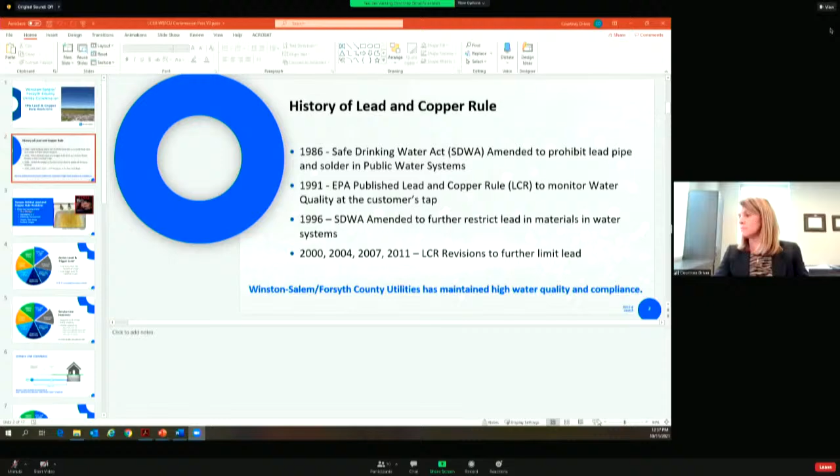Good afternoon, everyone. My name is Mike Osborne, a senior project manager for Black & Veatch, and joining me today is Emily Tummins, who's a process engineer and our lead and copper expert, who's been following and studying the new rule revisions that the EPA has issued for lead and copper. So, Courtney, if you would advance.

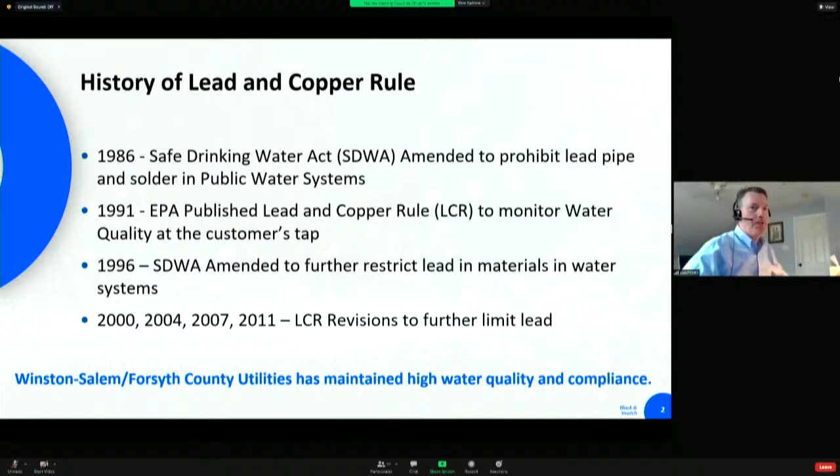So what I wanted to do was just give you a brief history of the lead and copper rule and how we have arrived here today with the rule revisions. In 1986, Congress amended the Safe Drinking Water Act to prohibit the use of lead and like-lead pipe and lead solder in public water systems. That was a key date in this whole lead and copper rule from the regulatory perspective—at that time lead was banned. Up until that time, utilities were able to use lead, and a lot of times they used lead pipe or lead goosenecks because the pipe is very malleable and it's easy to make connections from a service line into, say, the meter and then into the house.

Then in 1991, the EPA published the lead and copper rule, and the intent there was to monitor water quality at the customer's tap. That required sampling and maintaining records to make sure water quality was maintained, and utilities would have to take action depending on what the sample results were. Then in 1996, the Safe Drinking Water Act was amended further to restrict lead materials in the water system. This actually advanced into plumbing fixtures and into the customers' homes, so it reduced the lead content that could be in, say, a faucet or the interior plumbing. The lead and copper rule continues to be modified—in fact, there have been multiple revisions since 2000 to address needs as they've developed.

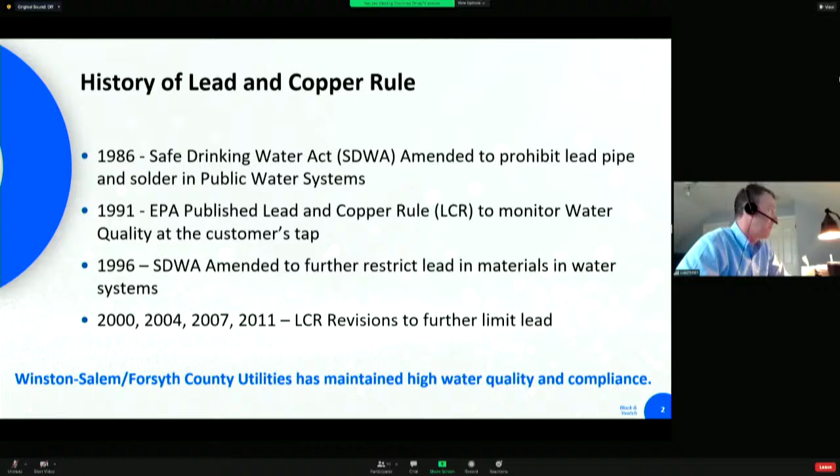So I want to point out that all utilities are required to comply with the lead and copper rule and its revisions. I also wanted to note that Winston-Salem Forsyth County Utilities has maintained high water quality and compliance with the lead and copper rule since its inception, so really good shape with meeting regulatory requirements. That's kind of a brief history of what's occurred in the past. Now I'm going to turn it over to Emily—Courtney, if you can advance to the next slide—and she's going to talk with us about how we arrived here today and what's driving these revisions.

Perfect. Thanks, Mike. Hey everybody, my name's Emily Tummins, as Mike mentioned. So all of us have heard about lead in the news. It's become a much bigger talking point as it's gotten onto the public side a bit more, especially in the wake of Flint, Michigan back in 2015 and 2016, and unfortunately that still is carrying on to today.

But this is really the breaking point in which the EPA determined that changes need to be made to the lead and copper rule. Mike laid out the history, but now there's a bigger push on trying to get utilities to be proactive, make changes before the water quality gets to the place that it did in Flint, and trying to avoid some of these issues where changes were made within water treatment or operations, or taking on a new system or new source water, without understanding all of the downstream impacts and how that could cause health concerns for customers. So again, Flint, Michigan was really the tipping point for all of this, but there have been other large utilities, large cities that have had lead issues in recent history that have kept this as a top news story and really pushed the EPA to make changes.

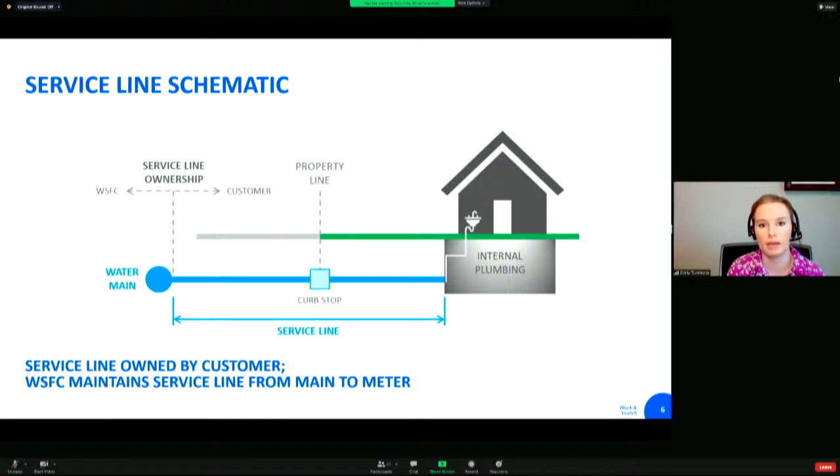So the next slide shows a schematic of what I mean by a service line. For Winston-Salem, Forsyth County utilities, the entire service line is owned by the customer, but the utility maintains the service line from the main to the meter. That's how the service line is broken down within the utility system, but this information needs to go into the inventory and be made public as part of this rule.

So the next slide talks about a replacement plan. First you have to develop your inventory, and then for any utility that has lead service lines, galvanized requiring replacement, or unknown service line materials, a service line replacement plan has to be developed and submitted to the state for approval. It needs to include things like how you're going to talk to your customers, what the standard operating protocols are for how a service line replacement would occur, what type of notification, and what percentage of your service lines would be replaced per year if the utility's 90th percentile were to exceed the new trigger level.

It also has to have a plan for prioritization — why you're replacing this service line before you replace this one. So trying to figure out where the highest risk is, and making sure that it's equitable across the entire distribution system.

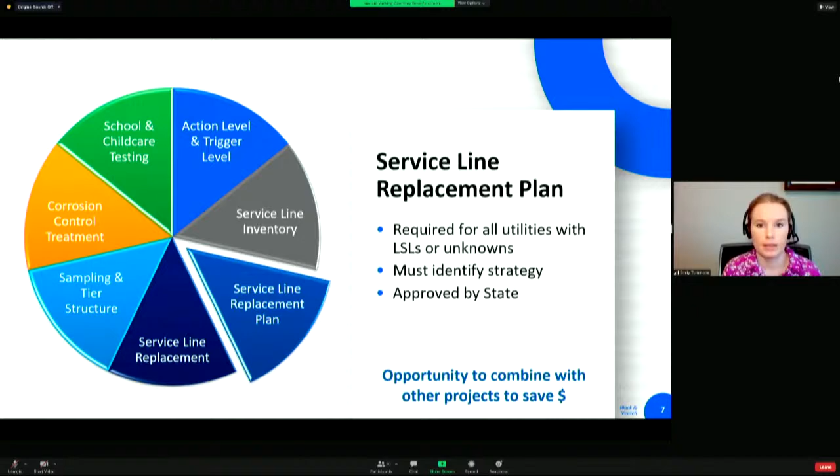The next component is actually the replacement. Either a utility can be proactive and start replacing lead service lines as soon as they're found, or utilities could wait until they're forced into replacements, like if they exceed that trigger level.

But whenever a replacement occurs, it's not just a simple construction project. There are some other components. Since you'll be on private property with the customer owning the service line, there needs to be that notification component as well as education to the customer to understand how to minimize their risk for lead.

Then the contractors or construction crews need to be trained on the best protocols for how to remove the service line. Even under the best circumstances, there still could be lead particulate that's released. So there's a process called whole house flushing, where you systematically go through and open up taps to try and get that lead particulate out.

And then even in the best circumstances, there still could be some lead remaining. So to do best by the customer, the utility provides a pitcher filter with a cartridge that lasts for at least 6 months so that the customer can filter their water from their kitchen tap.

And then within a 3 to 6 month time frame after the replacement, a follow-up sample needs to be provided to ensure that the lead levels have indeed decreased. So that's the replacement component.

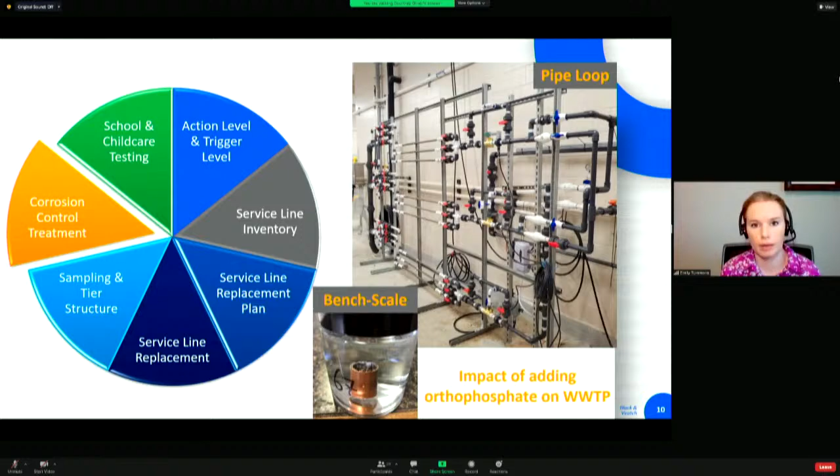So these are some changes that utilities will have to look at to see if there are opportunities to improve their water chemistry as it relates to metal solubility.

And the last change is the school and child care testing. Again, a big push on this rule is trying to increase public transparency and public education. The youth are the most vulnerable to lead and its impacts on brain development. So this push is really to make sure that parents understand what the water quality is that their children are consuming while at school or daycare. And then hopefully those schools and child cares, if there are elevated lead levels discovered in a drinking fountain, they can make those modifications and get a newer material.

Like Mike mentioned, there have been changes in the allowable lead content in these brass or bronze fixtures, faucets, or drinking fountains. So maybe those need to be changed out to newer appliances. The way the school and child care testing goes, it's looking at a 5-year testing cycle to get all schools and child cares tested throughout your service area. This is elementary schools, kindergarten through 8th grade. If high schools want to be tested, they can reach out to the utility and request that, but it's really focusing on the younger age school children. So over a 5-year period, all of these locations would be tested, and then the utility would be done at that point unless there are schools or child cares that reach out and request a sample. So it's a 5-year program.

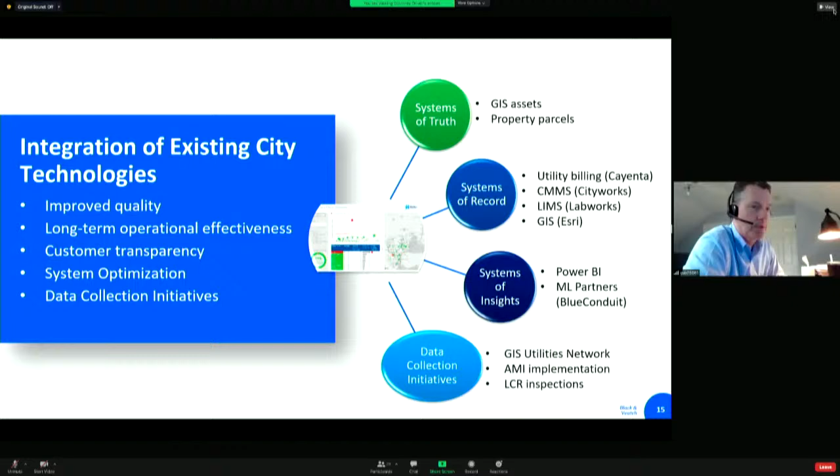So another opportunity with this program is the integration of existing city utilities or technologies, leveraging the databases and platforms that you have and integrating them to make the data more easily available, readily usable, to track the progress of the program and make decisions on a real-time basis. That'll be key to leverage in a program such as this, where there's a tremendous amount of data that's going to be generated and needs to be managed and tracked as we work through the program.

And lastly, we see that there's really an opportunity for local partners from the MWBE community, whether they're subcontractors or public relations or others. There's a lot of parts and pieces of this program that need to be managed and completed, so having availability and access to a variety of local firms is going to be important.

And then also looking for opportunities to partner with other local utilities. We'll be supporting Greensboro and High Point, and so being able to communicate and collaborate among the three utilities and share information, especially as we use common utility or media platforms such as the press and so forth, having a concise message that is accurate for all three utilities, as I understand that you serve similar areas as well.

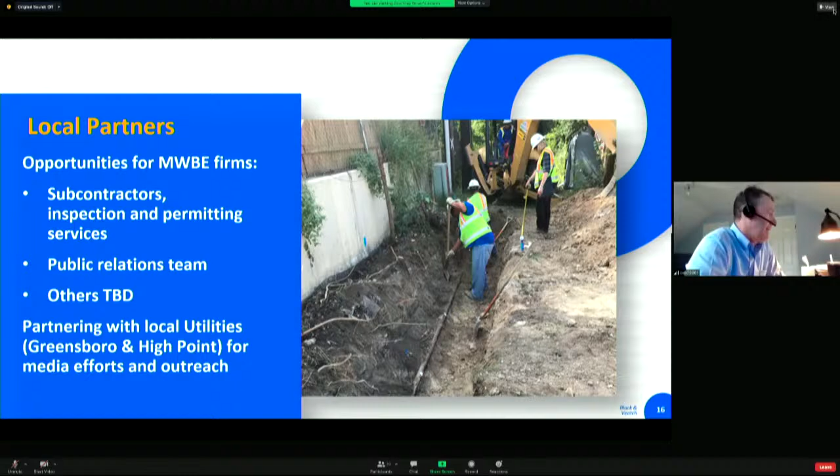So with that, that wraps up our presentation. We'd be happy to answer any questions that you might have.

This is Harold Day. I got a question. What is our level of lead right now in our utilities here? Do you know? I don't know that number off the top of my head. I believe I saw Bill Brewer on the call, he may know. I can address that, Mike.

Currently, our 90th percentile is well below the 15 parts per billion. We do occasionally have a detection, but it's usually, even when we do have detections, they're usually below the 15 parts per billion.

Well, I've done a lead study. I'm in the paint contracting business for 57 years, and 30 years ago, I did a lead study at Bowman Gray School of Medicine. The outcome was painters who had been exposed to lead paint all their life had 6 to 7 parts per deciliter at the highest we found. They said that was good because at that time 40 parts per deciliter was considered high, and we had no one tested that was even above 10 all over the state.

And the next thing is, what happens if somebody gets elevated lead levels? Do you know what the outcome of that is long term? Well, it depends on the age of the individual. Younger individuals are usually impacted more. But we typically don't know the outcome because sometimes the health department is involved, as there are alternate exposure avenues for lead. Like you mentioned, paint can be one avenue, water's another. So usually it has to be investigated to figure out what the root cause is.

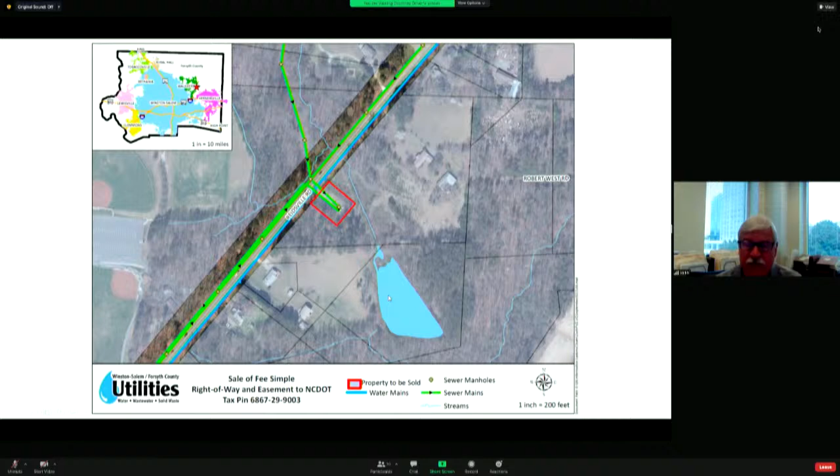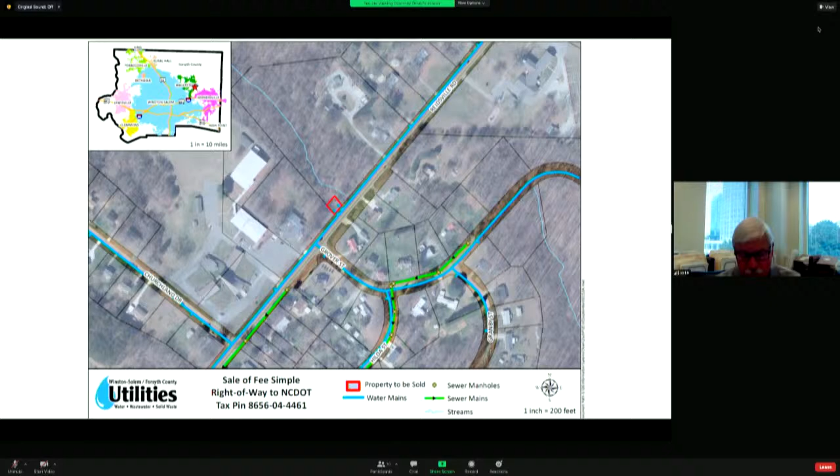That's the $5,700 offer. On the other property, there is a brick structure there. My understanding is that the station is no longer in use, but it is a brick structure there. So that one is a total take. They're going to take the entire lot and all the improvements there. That's $190,600 at that location, and the majority of that is from the structure itself, not from the land, but from the structure that's being taken. And that structure's been abandoned. Correct.

Okay, well let me just express one concern I have about this, and maybe Mike, you or Courtney could explain it to me. Whenever we get into these situations with NCDOT or even the city of Winston on one of the road development projects, and we end up having to pay all of this money to move pipe, it's because they've got the right of way. So because they have the right of way, whenever they decide to do something, suddenly it comes back on us. Doesn't matter how much public bond work got put into assessing what the cost of the road is for them to construct. Suddenly we have to pay millions of dollars to move pipe. So what are the ramifications when we start giving up right-of-way like what we're proposing to do right now?

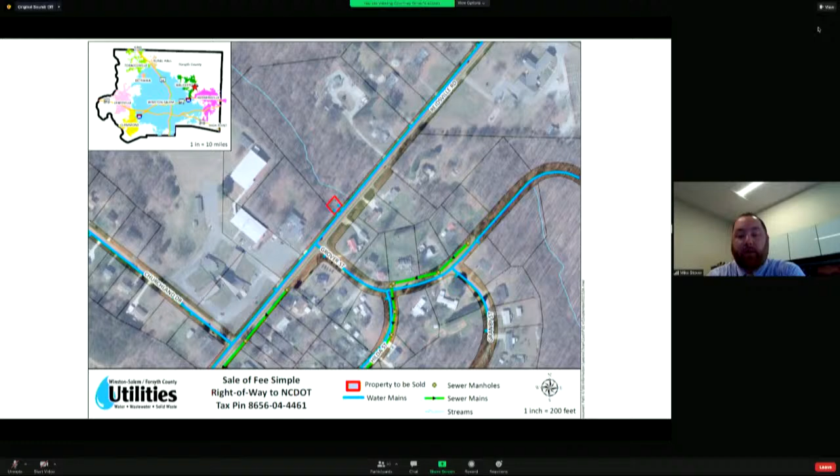I think let's look at this different ways. For this abandoned pump station, it is outside of the existing right of way. And if it was still in service, the DOT would have been responsible for paying to move it or relocate it. It's prior rights. If we were there, whoever was there first has to pay for the relocation of the infrastructure.

Right, so since this is abandoned, there's not a concern for us. They're just purchasing the needed right of way, and obviously we have an asset there, a building, so they're paying us for that as well. Okay.

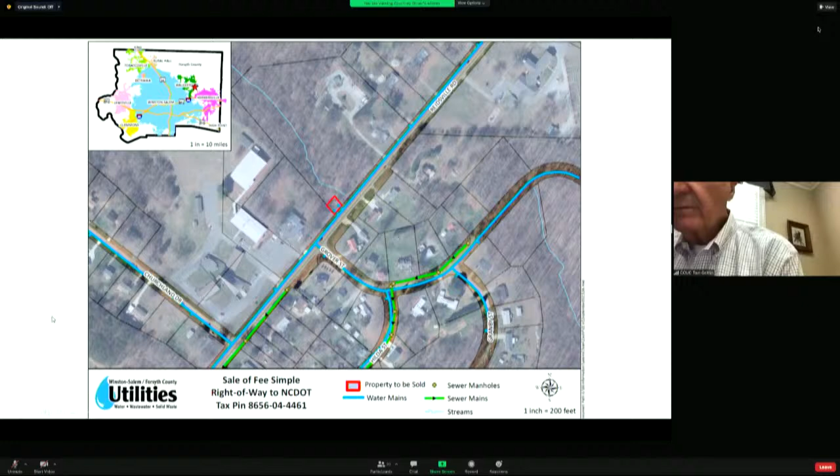It's Tom. Flip the other picture up of the sewer pump station. Yeah, when I saw that and you had the whole thing circled in red, I'm thinking the number that went with the taking didn't match the size, but it appeared we were getting rid of the whole pump station. And I think a little more background information in these items would be helpful to let us know exactly what's going on.

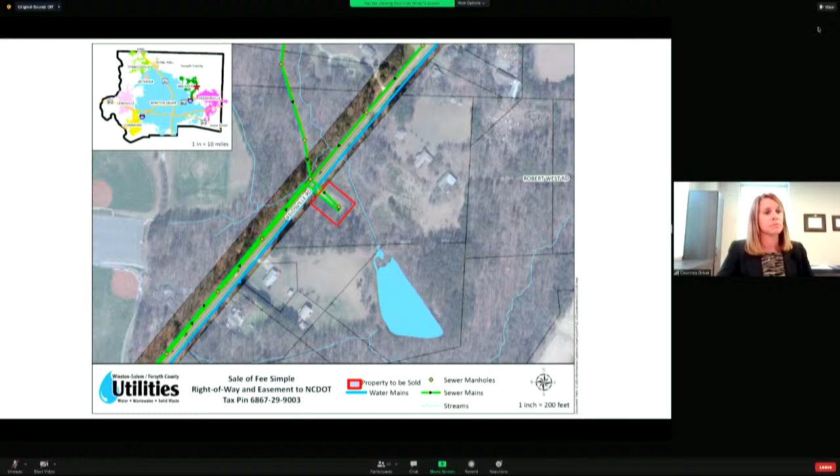Thank you. Okay, will do. Understood.

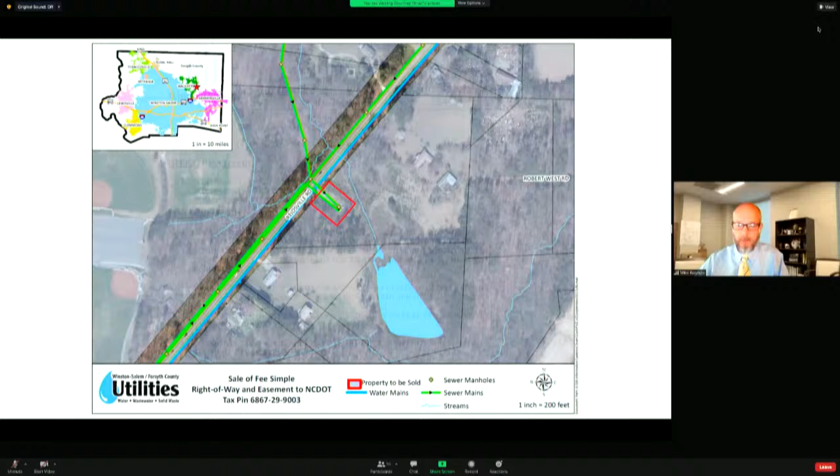Item 4 is consideration of resolution awarding a contract for lead and copper rule compliance program consulting services. You all have heard from the Black & Veatch staff, a presentation from them. Black & Veatch was selected to provide the consulting services for this program through our request for proposal process.

Staff negotiated a fee of $2,516,355 with Black & Veatch for these services and finds this fee reasonable, recommends approval. Are there any additional questions about this item at this time?

Item 5 is consideration of a resolution awarding a contract for the meter services building renovation project. The city advertised bids for the project, which includes renovations to the existing 2,100 square foot meter shop building, a 1,500 square foot building expansion, repaving of the entire parking lot, installing a new fire hydrant and water service line, and associated site work.

The bid alternate is to re-roof the 2,100 square foot existing meter shop building, so the entire roof will be the same age and under the same warranty. The building is located near Utilities Field Operations off of Martin Luther King Jr. Drive, behind Henry's Electric Motor Service.

Bids were received for this project on September 9th, with Bar Construction, Inc. the low bidder with a base bid of $1,506,750 and a bid alternate of $51,000 to replace the roof of the building, which staff recommends accepting as well.

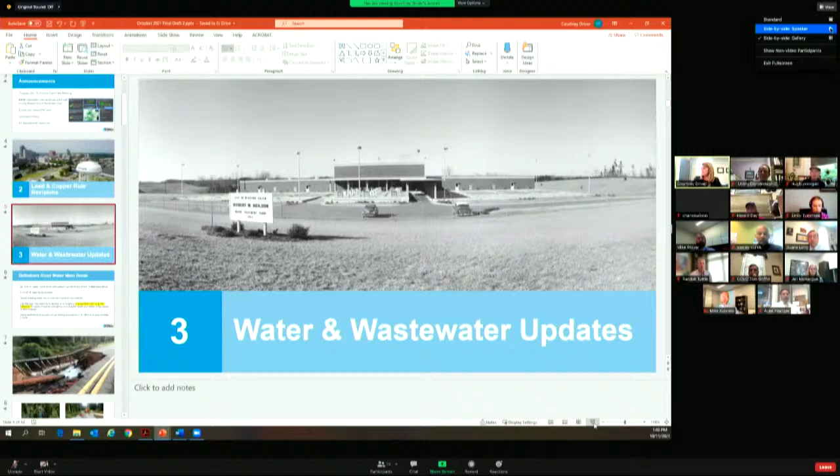Michael Stover will give you an update about Bethabara Road. Thank you, Courtney. Let's go back to that last picture real quick. I want to point out that's an early picture from when Neilson was constructed, and I believe if you pay close attention, that's Tom Griffin's car on the right. I'm not sure, but we thought that was a pretty deep picture. I'm glad Mr. Griffin is hopefully on mute right now—I'm laughing my way through it.

Okay, we wanted to follow up on the Bethabara Road water main break from last month. If you remember, at the September meeting we had this water main break—a 24-inch and 12-inch water main break that washed out a significant portion of Bethabara Road. Since then, we've been working to get the water mains repaired, which has been done, the road rebuilt, and guardrails, curb, and sidewalk poured back. Those 2 main breaks emptied 4 out of our 14 water tanks.

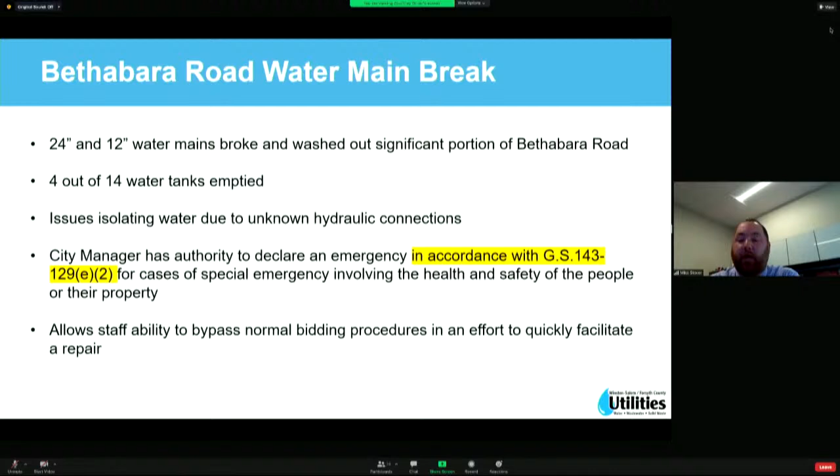We had issues isolating the water due to unknown hydraulic connections. Because of that, we had to install temporary line stops to stop the water so we could make the main repairs—I'll show you a picture of that in a second. We quickly knew once we got on site that Monday morning that the scope of work was significantly more than our in-house crews could handle. The city manager issued an emergency declaration under General Statute 143-129E2, which allowed us to find a contractor and facilitate a quick repair. We called Ramey Incorporated, who are under contract for the Water Main Improvements contract. They're local, they do really good work, and they responded within 30 minutes.

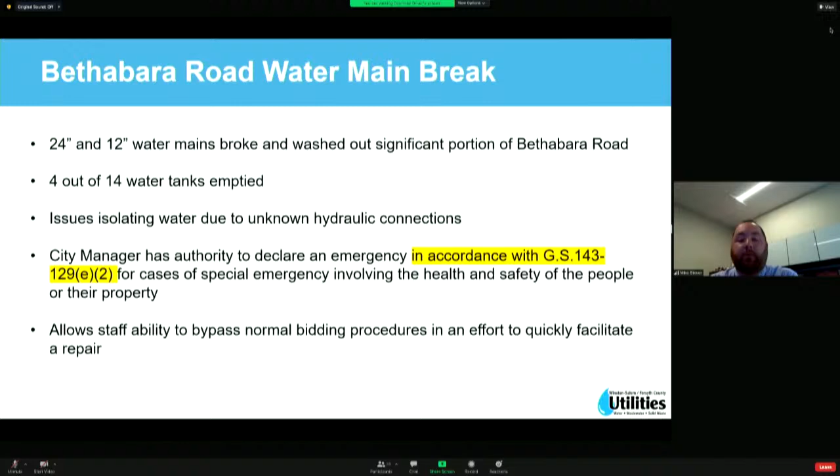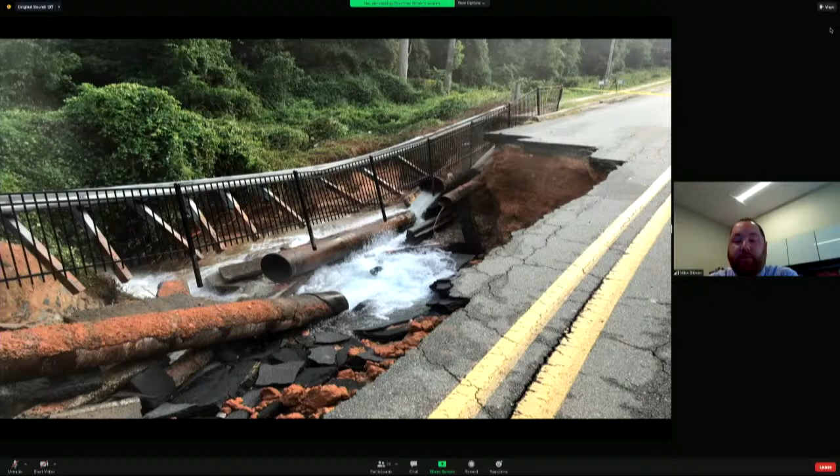Any questions on the Bethabara Road main break?

I did, go ahead Tom. Weren't there some reports of cars that were turned over or something? There were two wrecks, my understanding, both related to the break. I don't really know any details other than that. I can tell you this, there were pieces of one of the cars in the hole that we removed.

Okay, Mike, unknown hydraulic connections, can you elaborate? Sure thing. First thing we do when we have a main break, we check our GIS, check our as-built, locate the nearest valves on either side of the break, and we isolate those valves. We shut them down and stop the water. We went to every valve that it should have taken to shut the water off, and we still had flow. It throttled the water down probably 80%, but that last 20% was still enough flow that we couldn't get in there and safely make a repair.

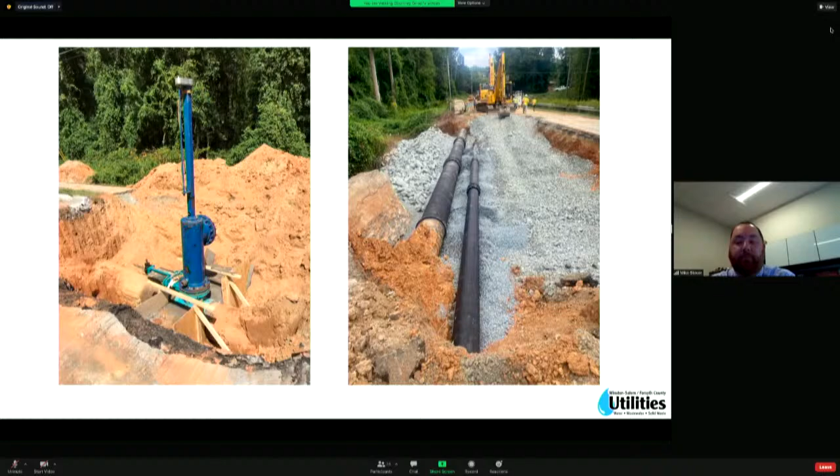As Courtney mentioned earlier in the meeting, there were some emails going back and forth about the use of PVC in our water system. We have evaluated that over the years multiple times, and PVC is included in our water sewer technical specifications for the following applications. It is just not allowed under the certain application that this project is going through. So right now we allow PVC for 2-inch water main installations, 4-6 inch restaurant sewer connections, 4-inch diameter smaller sanitary sewer force mains, and inside drop manhole assemblies for your sanitary sewer system.

What we found, material standards vary from utility to utility. Raleigh, Greensboro, Orange County Water and Sewer Authority, and City of Durham have similar specifications to us. Charlotte, Fayetteville, and High Point do allow PVC for water mains and sewer.

One of the biggest things that we evaluate when we look at specifications is full life cycle analysis versus the initial investment of the pipe itself. There's some very tangible and obvious benefits of ductile iron pipe over PVC. When you look at the life cycle cost of PVC, you have to take into account tracer wire, because it's plastic and hard to locate, additional stone backfill to support the pipe, and additional inspection costs. Once you start considering those factors, the price is pretty competitive to ductile iron.

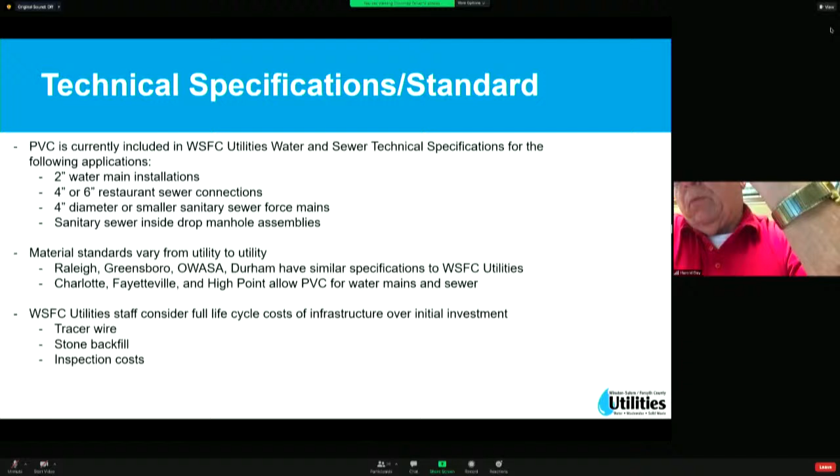Cool. Yeah, thank you. Randall, I got a question about PVC. Is water standing in miles of PVC pipe, what leaches off the PVC into the drinking water? That would be a question I'd like to know in the long term.

Can you say that again, Mr. Day? About water standing in PVC pipe for long term where it's not being cycled too good, does PVC leach off anything into the water system? Not that I'm aware of. I think the only thing from my research, others might know more than I do, but the only concern with PVC is if you install it through a contaminated site with maybe fuel contamination, it could permeate through the plastic pipe itself. But as a kid, we had the water hose and it tasted pretty nasty, but we drank it anyhow.

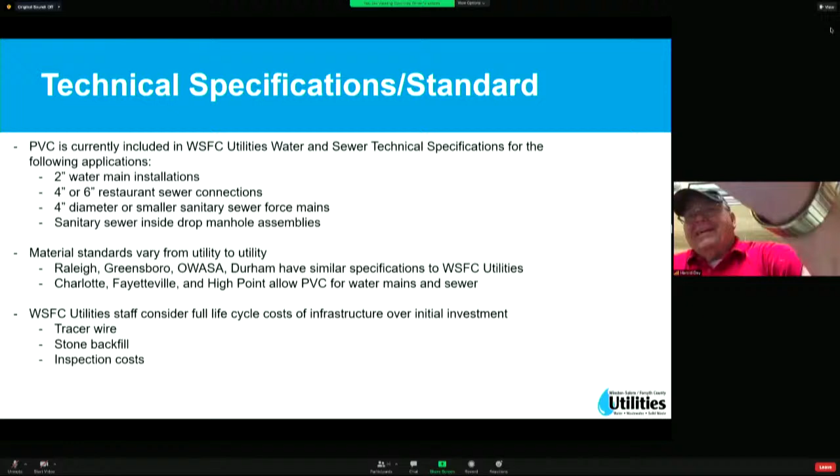So far in FY 21-22, 5.2 miles of water and 8 miles of sewer has been conveyed.

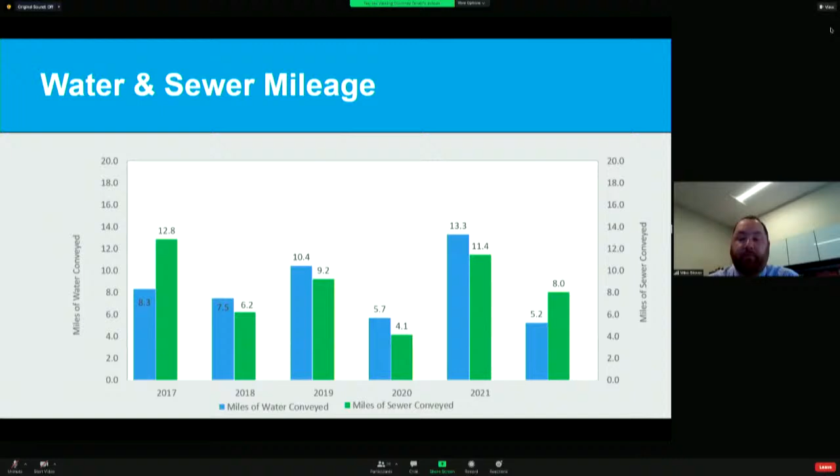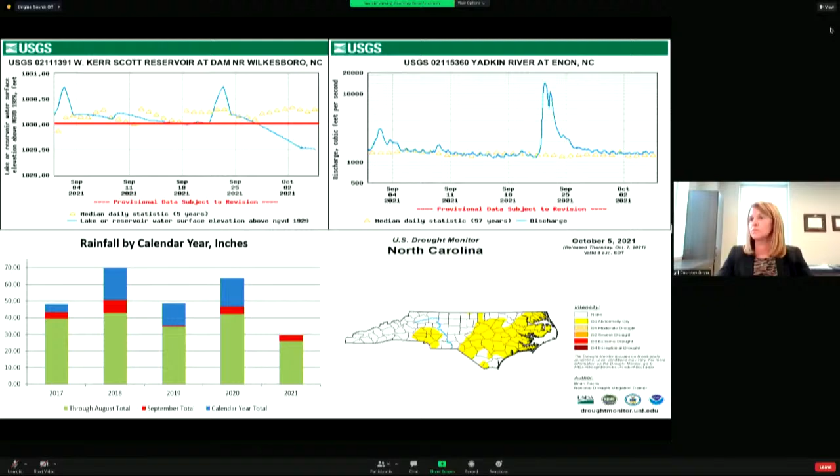Here's the drought monitor and rainfall charts. So far this year we're a little behind where we were last year, and really years past as far as rainfall goes. Forsyth County is not in any drought conditions like some of the eastern parts of the state are right now.

Sanitary sewer overflows per 100 miles. We had a really good month in September, one sanitary sewer overflow. In August we were above where we were the last 2 years, and due to a really good month in September we're now below where we were the last 2 years. So on pace for another record year.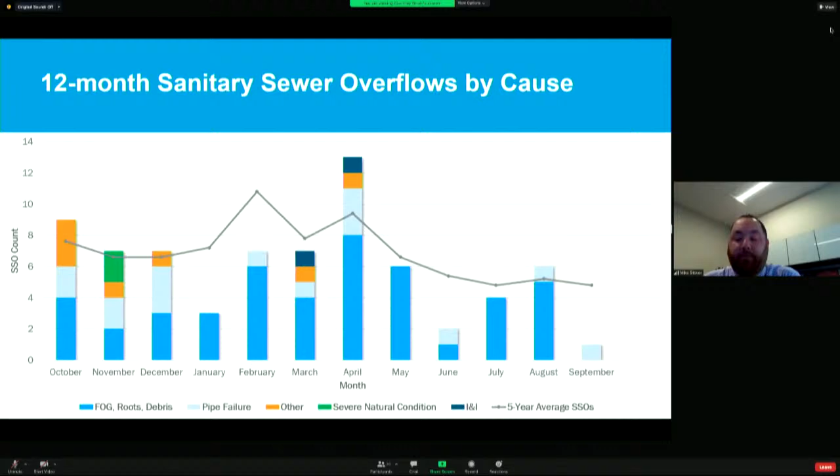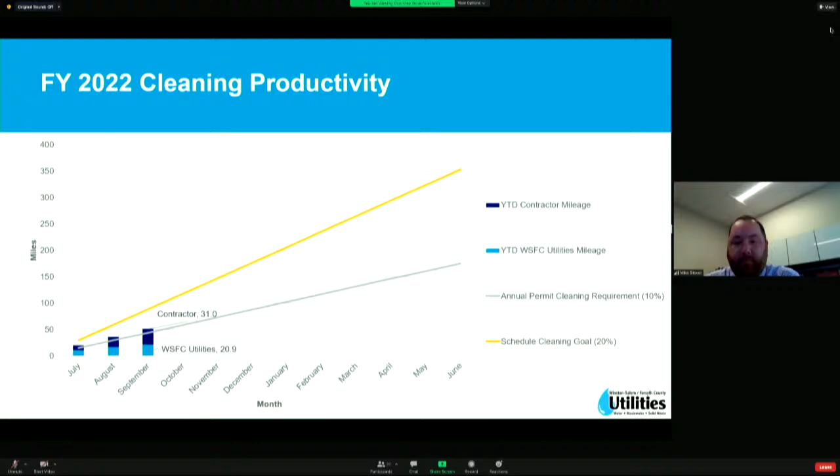Any questions on any of the water and wastewater updates?

I want to start out with the first quarter financial results for solid waste operations. You can see the expenses, that's personnel and operating, are at $1.3 million through the end of September. That's below the budget and below last year. We were about 1.7 at this point last year.

Revenues at the same point in the year are at 3.4 million compared to a budget of about 2.9, and last year we were at about 2.8. The revenues are up.

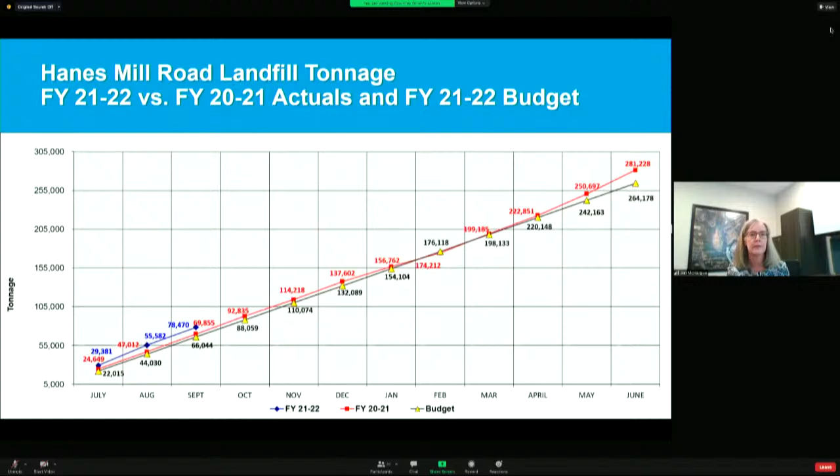The primary source of those revenues, as you probably know, is the tonnage that we take in at Hanes Mill Road landfill, and we've taken in 78,470 tons. That's a little bit ahead of last year. We were just under 70,000, and the budget is about 66,000 for this point in the year. We did decrease a little bit in the month of September down to 22,887, and that's primarily due to a couple of construction projects that have been completed that boosted our tonnage in the summertime.

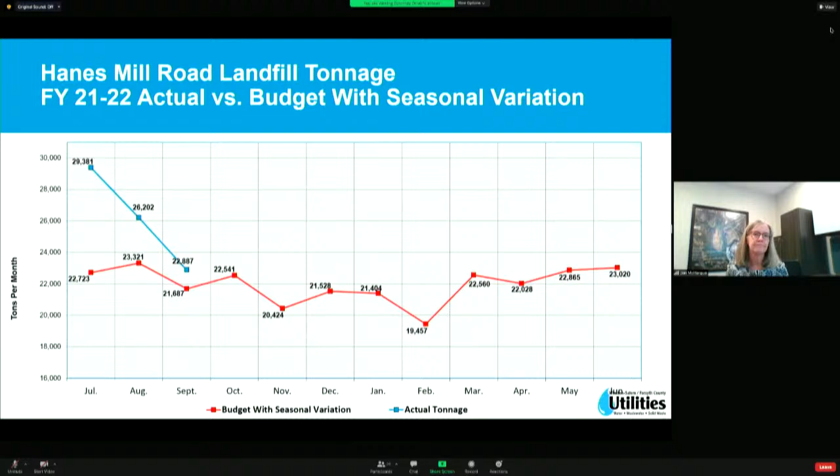We're seeing a similar situation at Old Salisbury Road, where it decreased a little bit in September, but we're still at 11,607 tons. So we're ahead of last year and ahead of the budget at that facility as well. No other updates on solid waste for this month, unless you have any questions.

We have completed the field work for our alpha and beta initial deployment, which is just a little less than 10,000 meters. The alpha base station is installed and the meters are communicating with the radio network there. We're continuing the software implementation and integration activities. Right now everything is going well in that regard and looking good.

The gamma phase, which is approximately 34,000 meters, is our second phase of our initial deployment, which was approved by the commission in June. Meter box inspections with lid replacements are underway, and the meter installations will begin shortly. We're currently anticipating completion of the gamma phase in what we're hoping will be the fall of 2022.

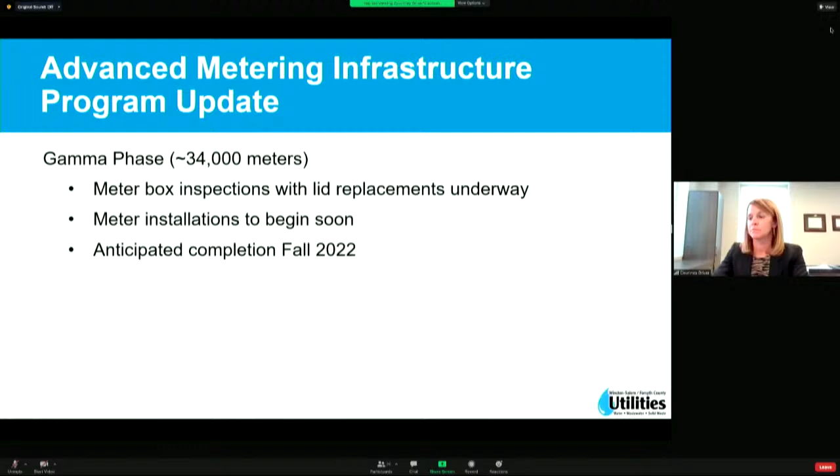But we're monitoring supply chain delays for meters and radio endpoints caused by the worldwide computer chip shortage that could impact the schedule if we continue to see delays. We have seen a slowdown in the number of meters we're able to receive, but we are a priority customer for Sensus, and they're doing their best to get us what we need to meet our deadlines.

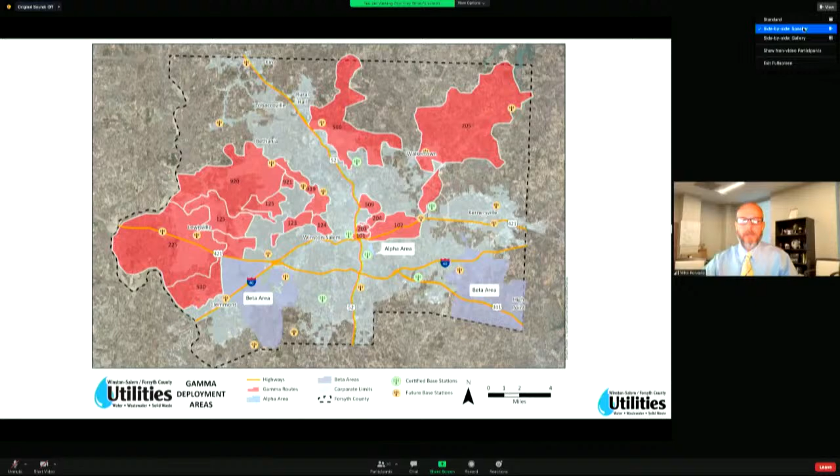Regarding the base stations, we've got 10 out of the 29 installed. We'll be bringing the additional lease agreements with the county to you all as soon as possible. Any questions on the status of the AMI project?